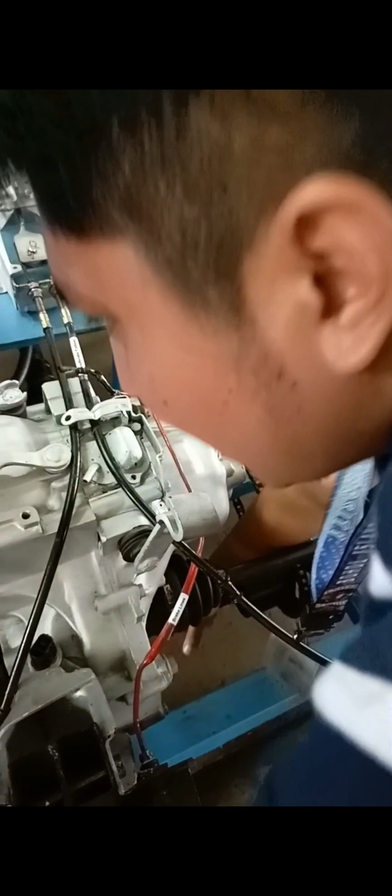Good day, ma'am. I am Jimar Mangguray, and I am assigned to explain the drivetrain.

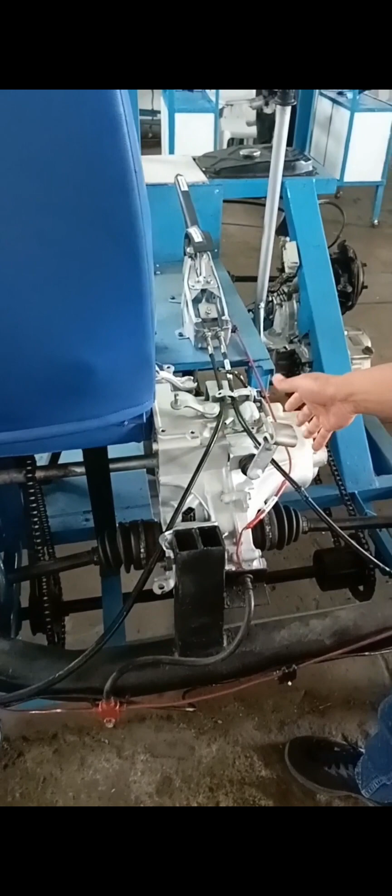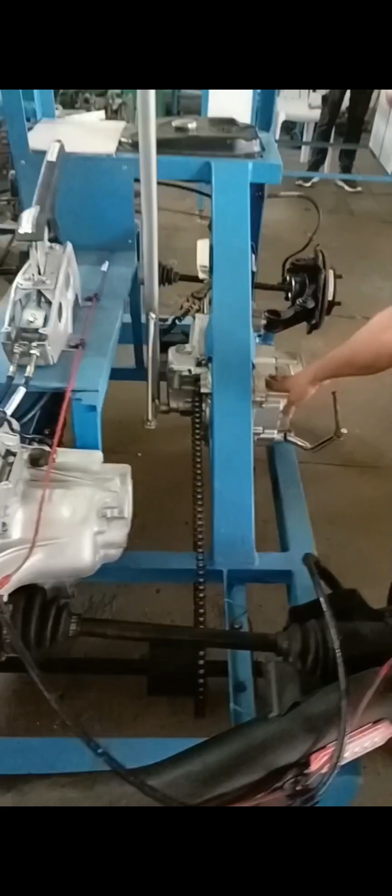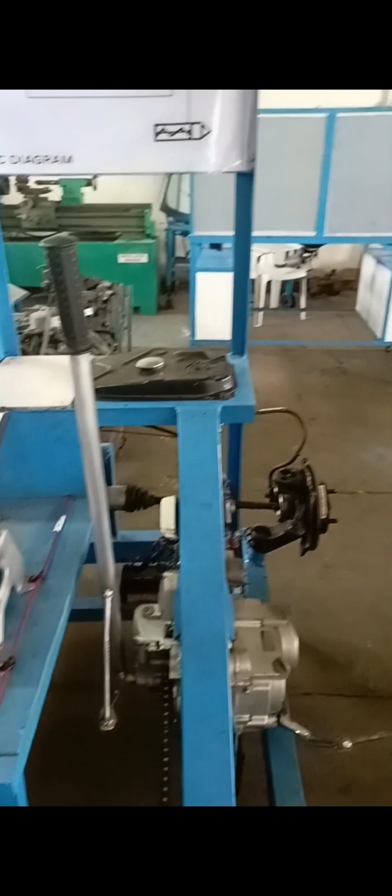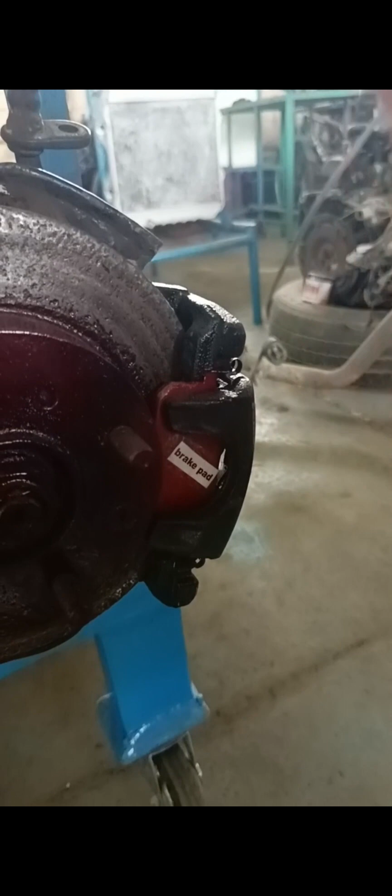First of all, this is the transmission, and it is the main part of the drivetrain. It converts the power from the engine. The handbrake lever, the brake booster, the brake cylinder, the brake reservoir, the brake lines, the drivetrain, the drive shaft, the brake rotors, the brake pad, and the diagram, the schematic diagrams.

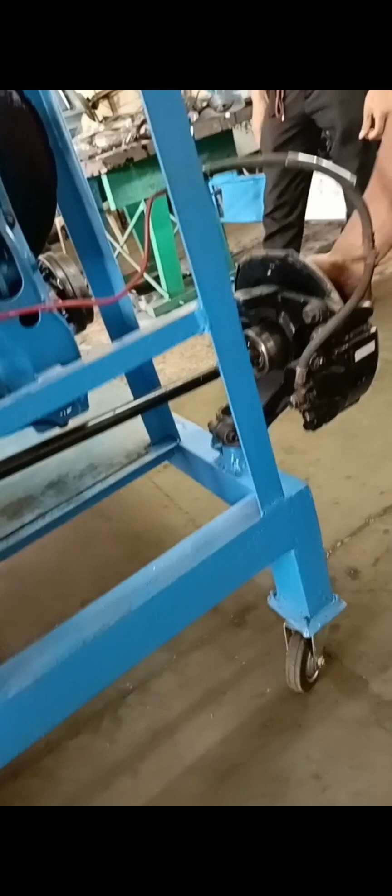And for the brake system, I will give the discussion for by Miguel.

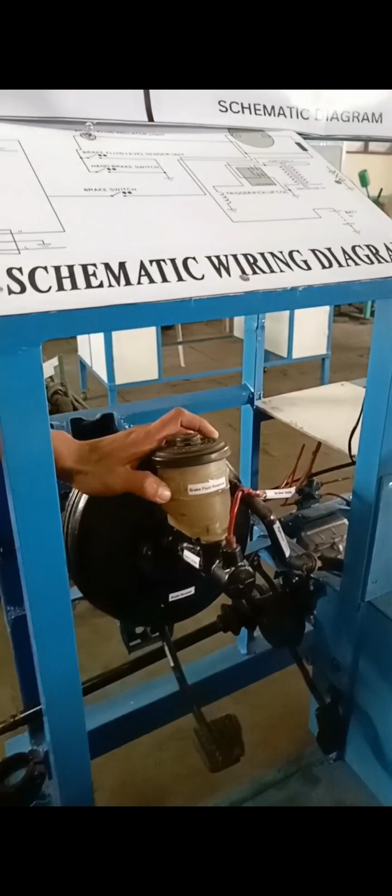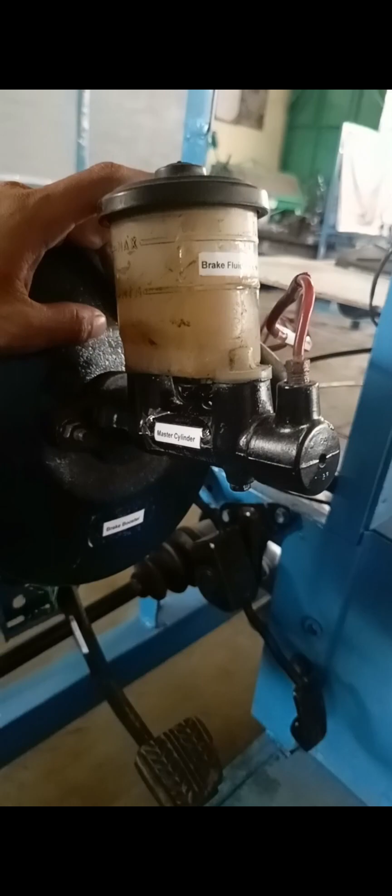Good day, ma'am. I'm Miguel Sipion. For the brake part of the brake system, we have the brake fluid reservoir. We use the reservoir for the fluid, and the brake cylinder, and we have the brake booster, and the brake pedal.

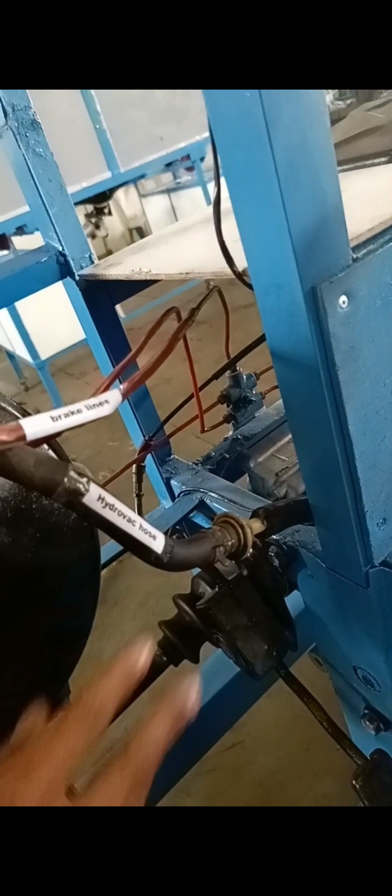Brake booster with hose, hydrovac hose to suction air, to the brake booster, to make it easy to press the brake pedal, and with the brake lines, you can see there.

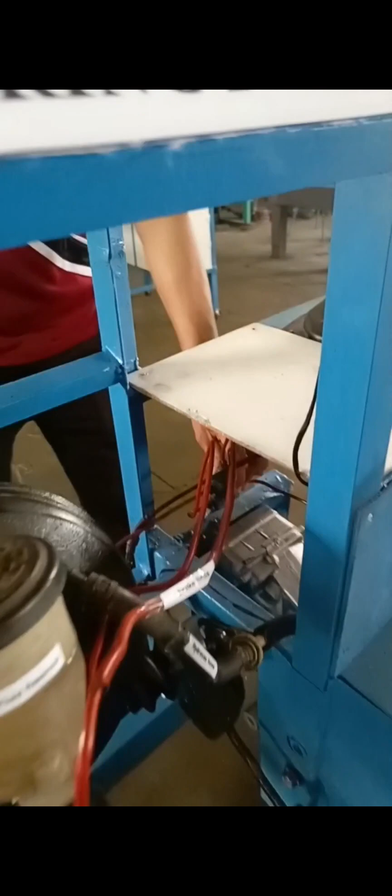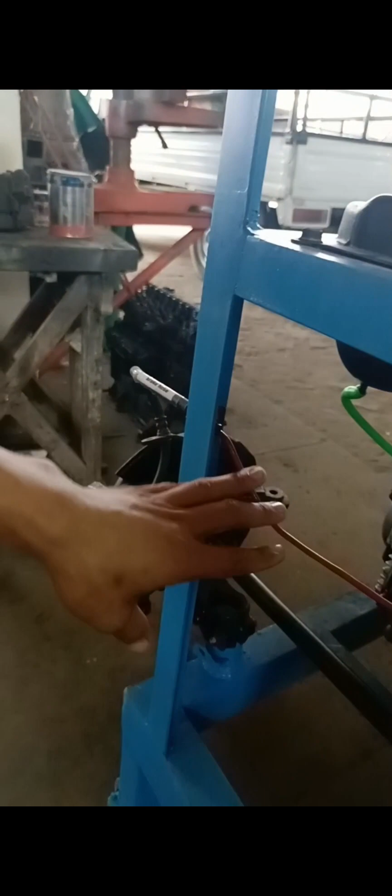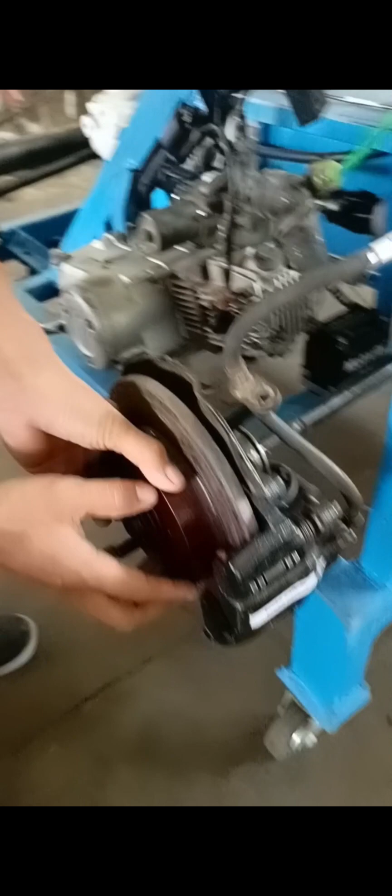A metering valve is used to divide pressure to the caliper, to the caliper front. You can see a caliper, the caliper with the brake pad. The caliper presses the brake pad to the brake rotors to stop the vehicle.

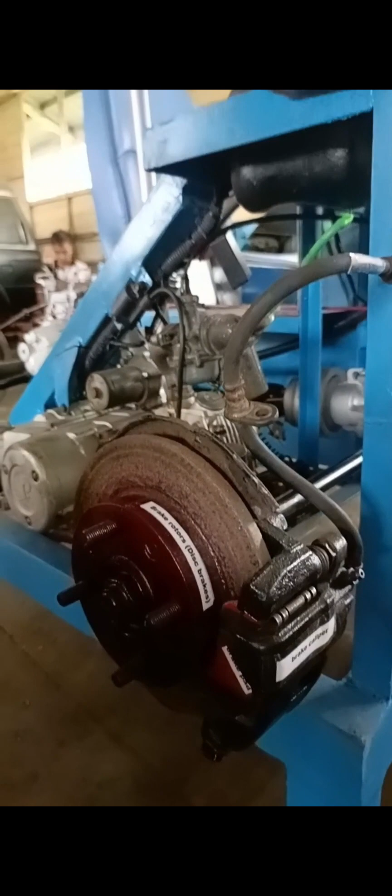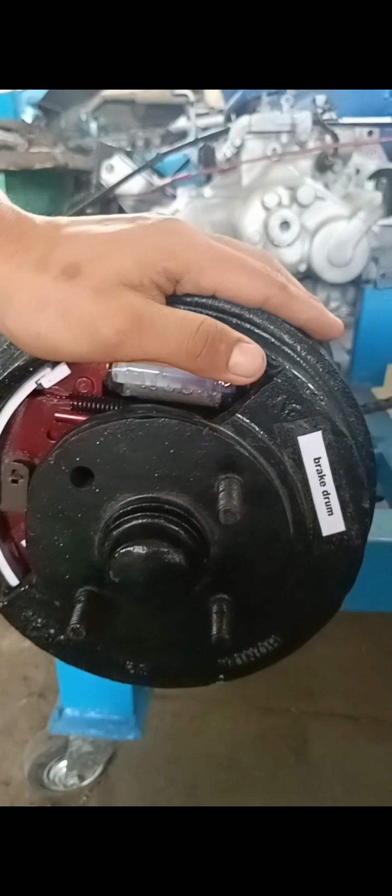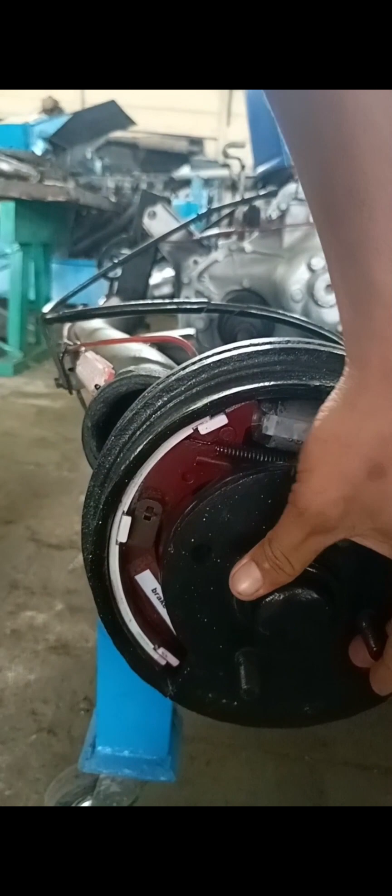And this is a brake drum. You can see there a cutaway design to see inside the brake drum. You can see a brake shoe and this piston inside the wheel cylinder and spring.

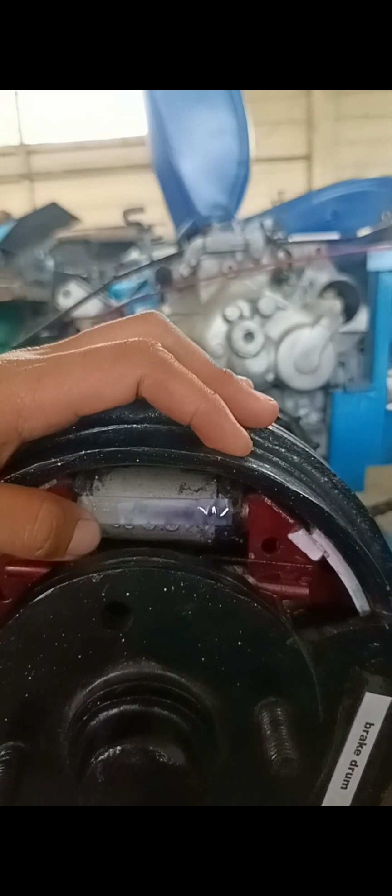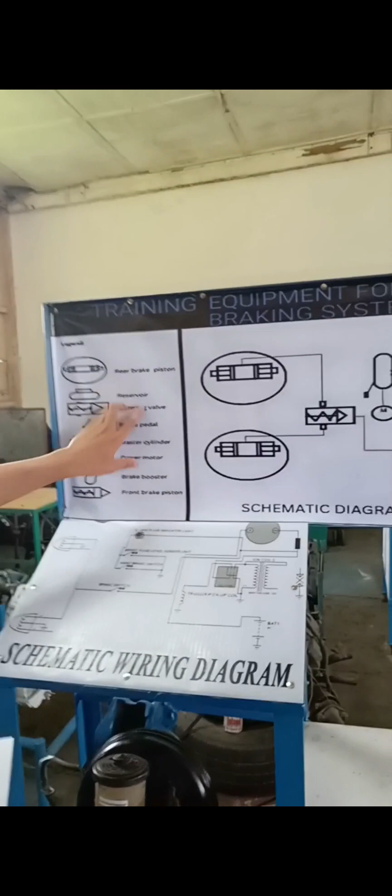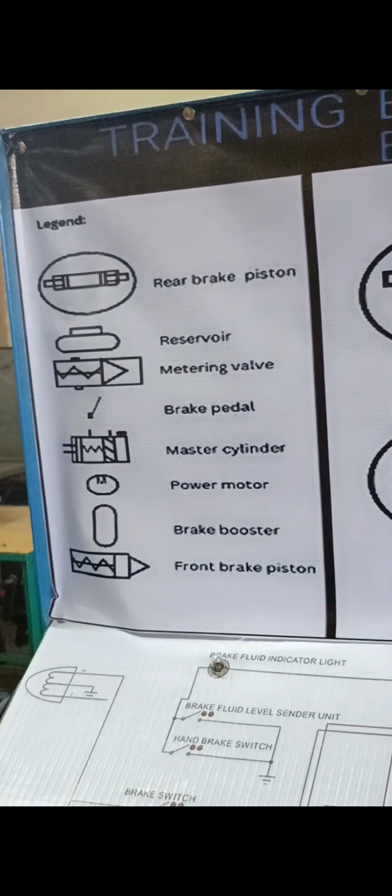Here we have our schematic diagram, with a legend here. It states that this symbol is the rear brake piston, which is located here, and we can see it in the training equipment. The rear brake piston is located here inside the brake drum, as you can see.

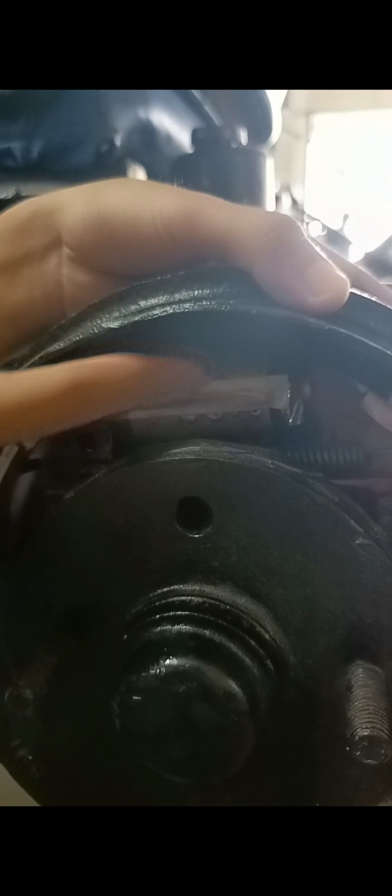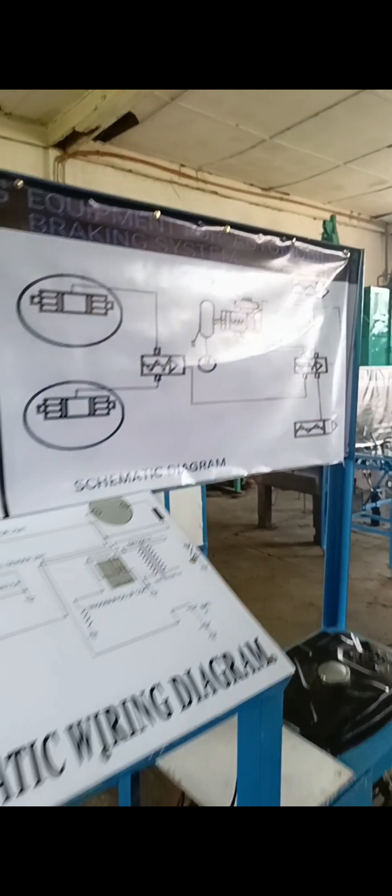Here is the symbol of the reservoir, which is located here, the brake fluid reservoir. And then the symbol states it is the metering valve, which we have two of in our training equipment. We have it in the front, which is this one, and at the rear, which is this one.

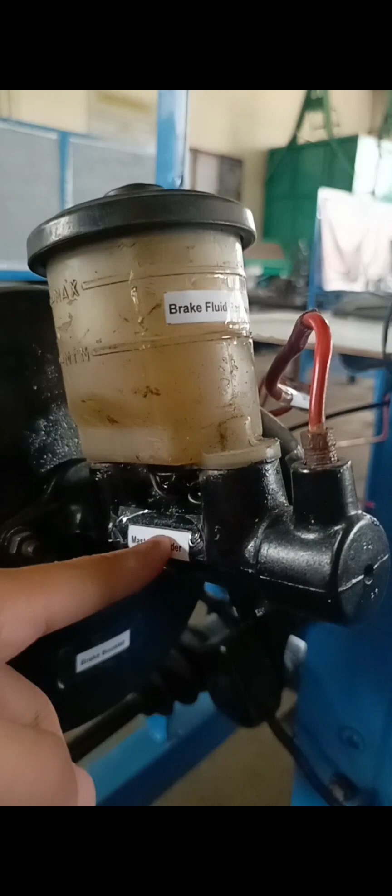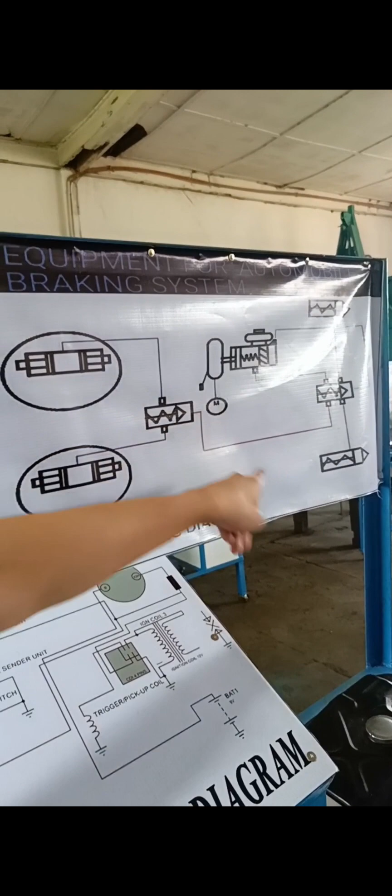Here is the symbol of the master cylinder, located here and here, and then the power motor, or the one who pumps or vacuums the brake, which is the symbol here, located here. And then the brake booster, whose symbol is here, located here.

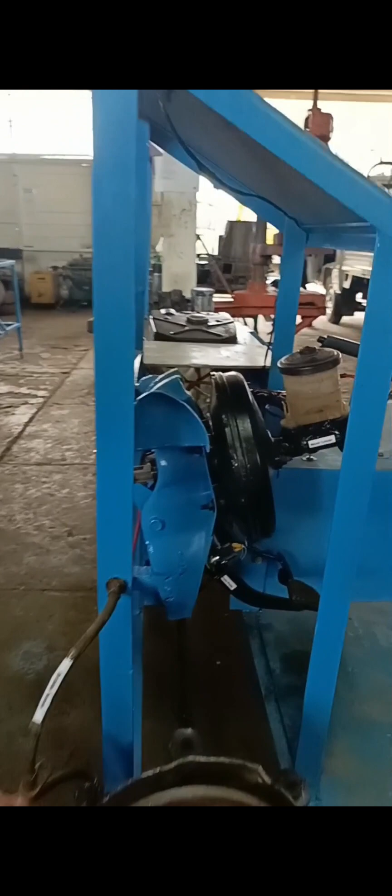And then the front brake piston, which cannot be clearly seen visually, but it is inside the brake calipers, which is here.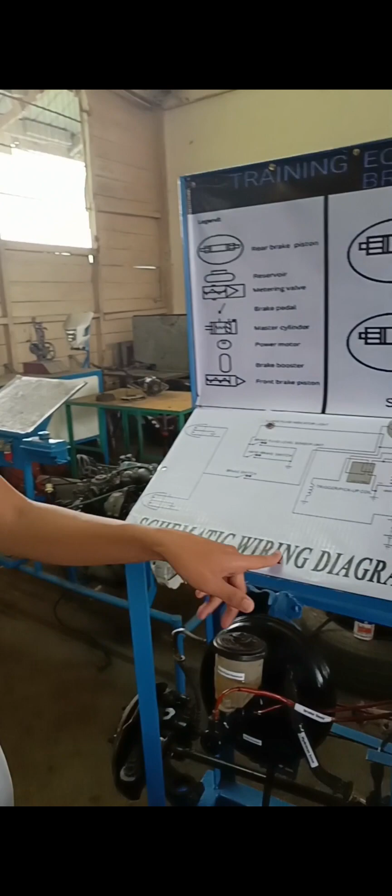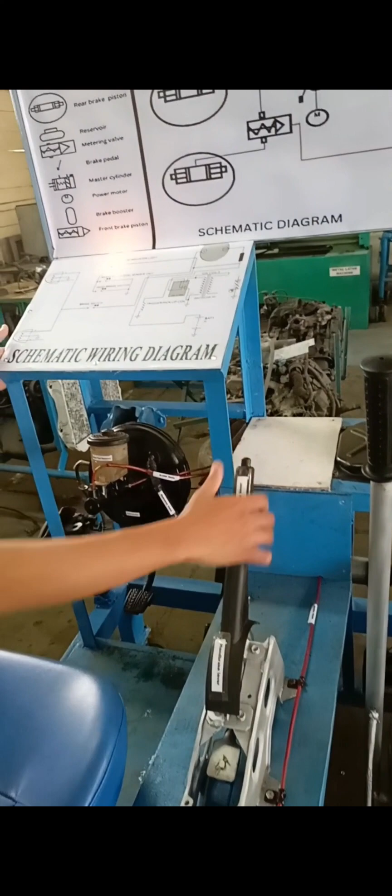And then we have here our schematic wiring diagram, which has the brake fluid indicator lights. If the handbrake lever is used, you can see the light here, the brake indicator light and brake fluid indicator light here.

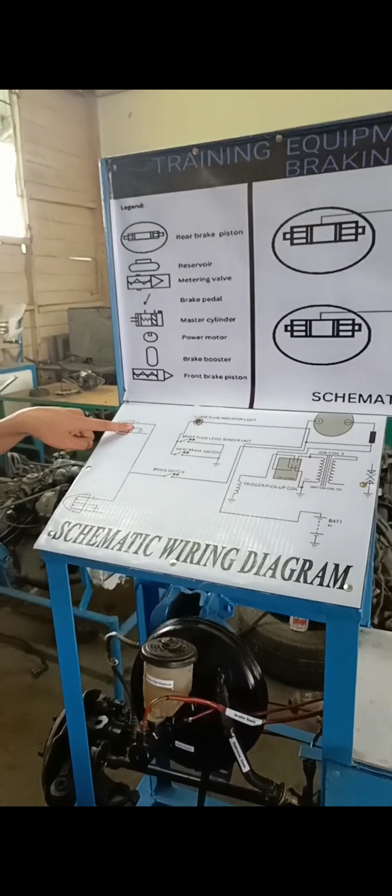It is our brake light on the rear, which can be seen when we press the pedal here.

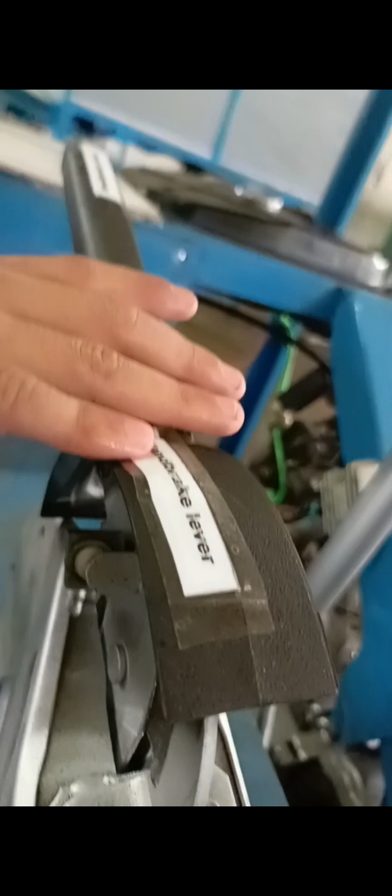And then there's this handbrake switch, which is located here, and then the brake switch, which is here.

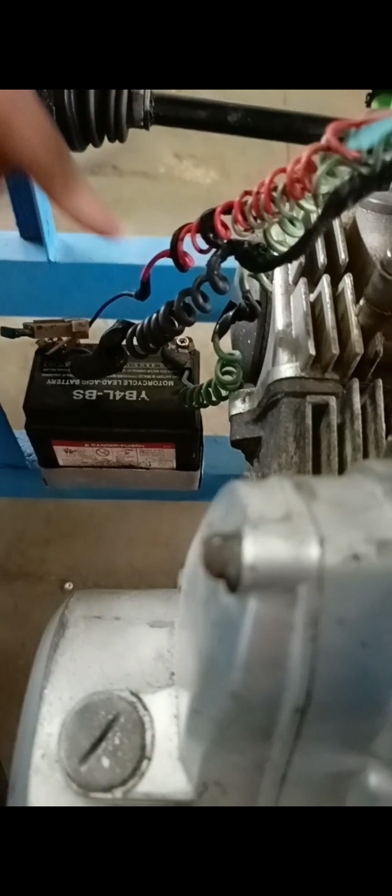And then we have here our CDI 4 pins, which is here in our motorcycle engine. And then the battery, which is here. And the stator coil, which is located inside our motorcycle engine here.

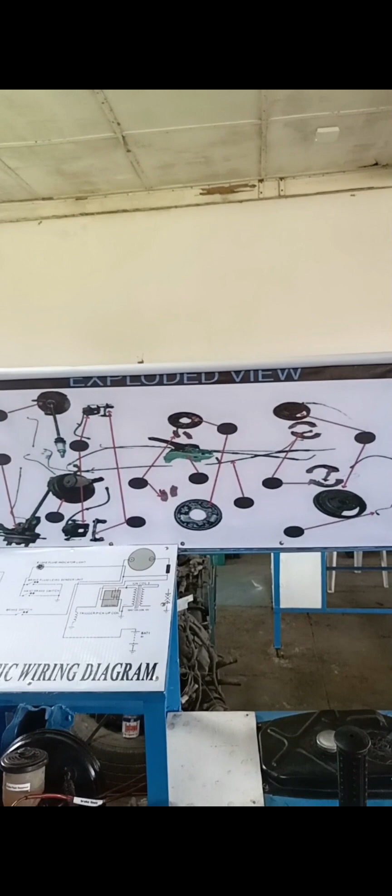And this exploded view can be used by our instructors to identify or test with a quiz. It can be marked as number 1, number 2, number 3, and then the student may answer the identification.

So we also have this handbook here, handbook for training equipment in braking system, prepared by yours truly.

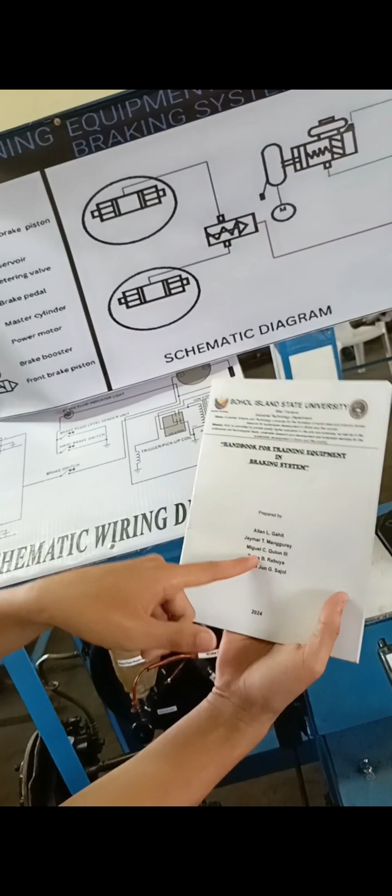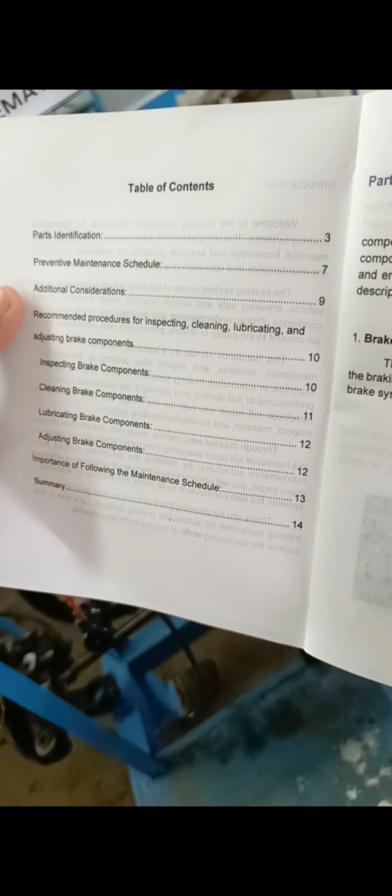And then we have the introduction here, and the table of contents, which is the parts identification, preventive maintenance schedule, additional considerations in PMS, and recommended procedures for inspecting, cleaning, lubricating, and adjusting brake components.

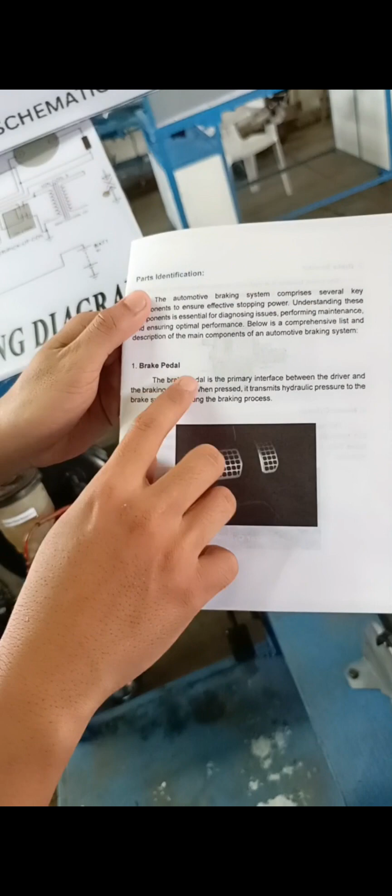So we have here the parts identification, which is the brake pedal, and the function, which is the brake pedal is the primary interface between the driver and the braking system. When pressed, it transmits hydraulic pressure to the brake system, initiating the braking process.

So this handbook can be used by the students so they can learn more about the braking system. You can see here the functions, the specific parts of the braking system and their functions.

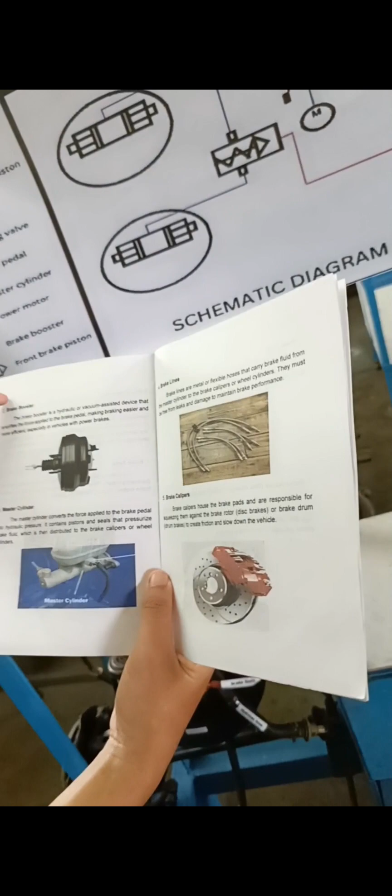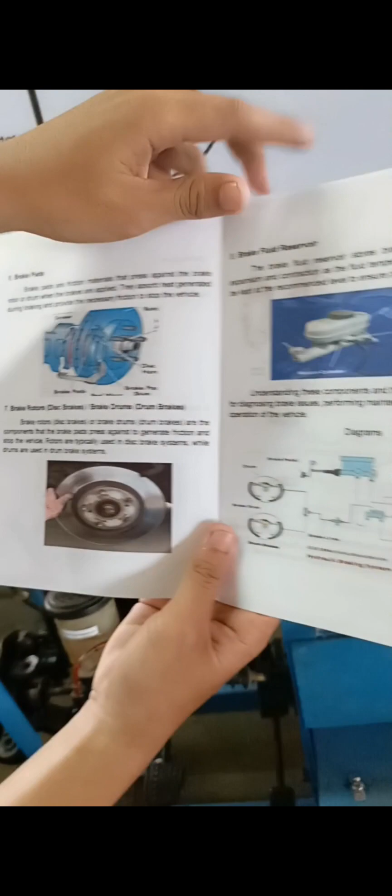So we have this brake booster, the master cylinder, the brake lines, the brake calipers, the brake pads, the brake rotors, the brake fluid reservoir, and we also have these diagrams.

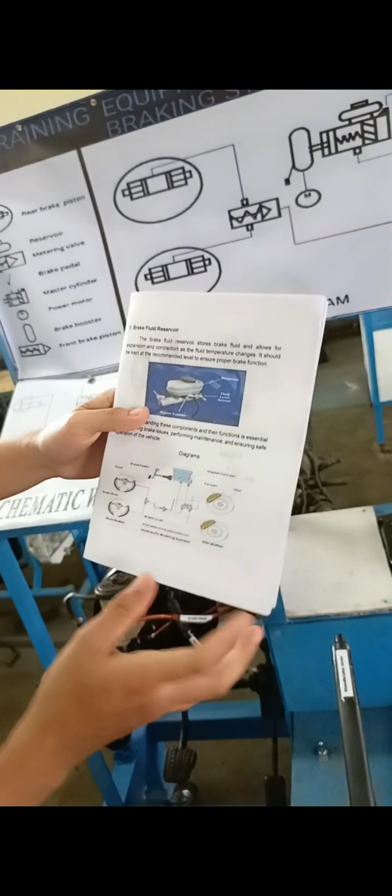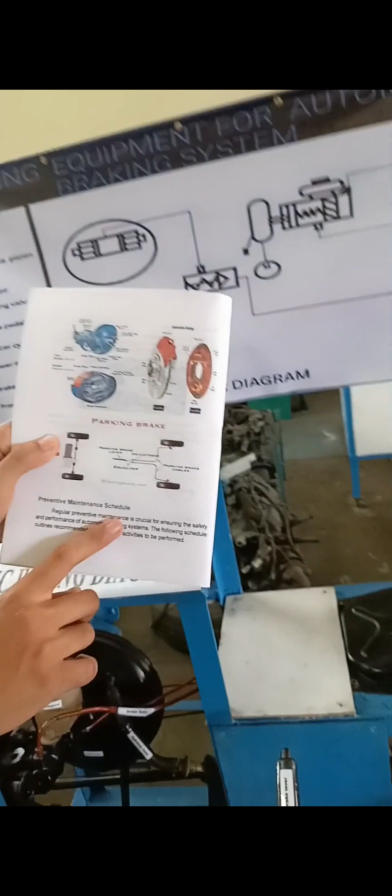So here you can see the preventive maintenance schedule, or how to maintain this training equipment. We have this every 6 months and then annually.

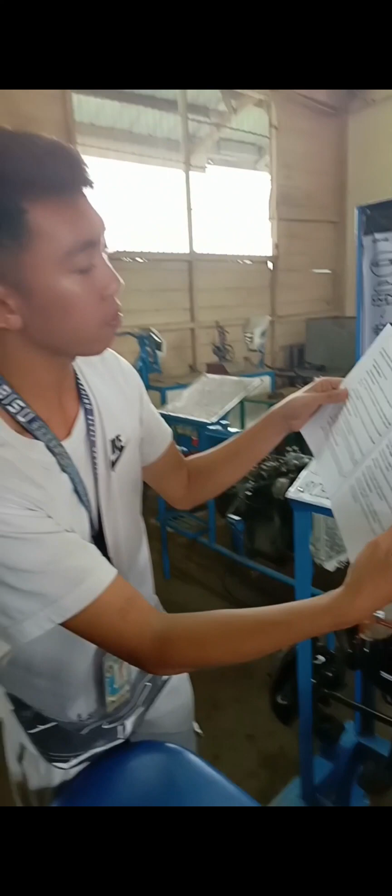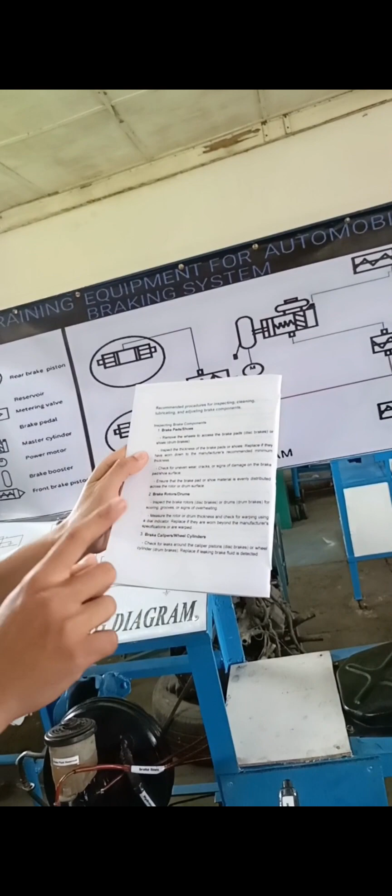And then we also have the recommended procedure for inspecting, cleaning, and lubricating. So inspecting brake components: inspecting the brake pads, inspecting the brake rotors, inspecting the brake calipers or wheel cylinders, the brake lines and hoses, and then cleaning the brake components, which is cleaning the brake calipers, slides and pins, brake rotors and drums.

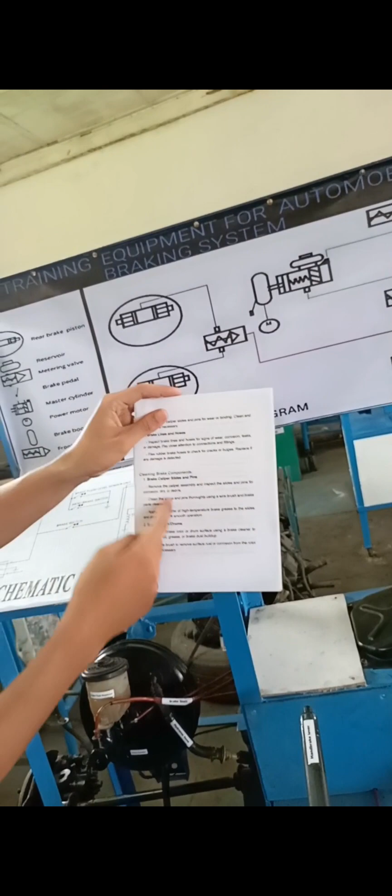So this training equipment can also be used for educational purposes so that trainees or students can understand better specifically about the braking system. So that would be all, ma'am.